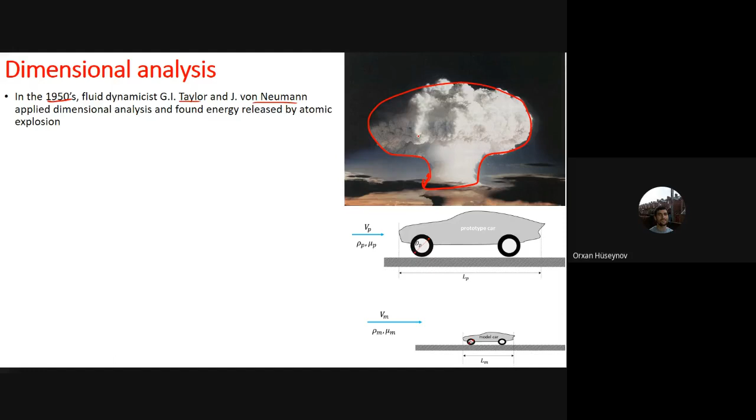So they actually did the dimensional analysis on this atomic bomb without doing its experiment, and they found the formula that governs the relation between the energy and its properties. So during an atomic explosion, you have the energy released by this bomb. That energy is a function of some parameters like its radius or its density. It can be the temperature, etc.

So by only writing the shape of the function and working with dimensional analysis, working only with dimensions, they found that E is a function of R, rho, T. For example, R squared rho by T, which is not true, just an illustration. So they found this relationship without doing an experiment, and you cannot get close to atomic bombs, it is impossible. Only by working with the dimensions of the properties.

So what they achieved is to save money. This is the first part of the importance of dimensional analysis. The second importance of dimensional analysis is that you are not producing the expensive full-scale product, but you are working with the model. Say you are trying to produce a car. This is the prototype car, the real car. Prototype means real.

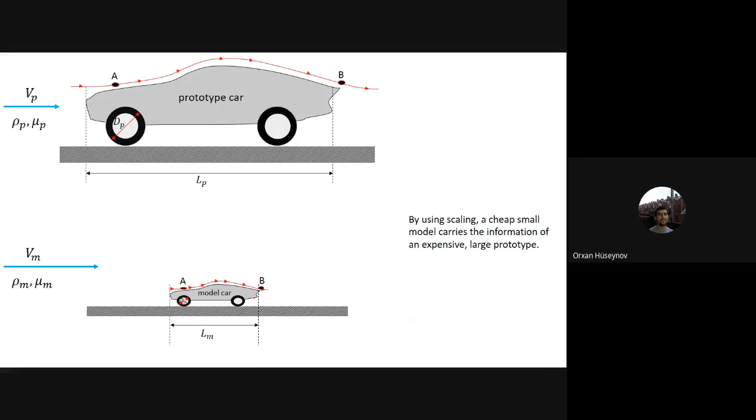Okay. Let's give you one simple example. Our example will be concentrated on the car because it is a more general example, and it is also easy to imagine. The force that is acting on the car depends on the length of the car, the density of the air, the velocity of the car, and the viscosity of the air. And by force here, I mean the force by air. The aerodynamic force, you can say.

The aerodynamic force acting on the car depends on the 4 parameters here: the length, the velocity, rho and mu. Okay. And you cannot find the relationship between them by mathematical analysis because it is a very complex flow that happens over the body. So to find the relationship between the force and these variables, we need to do an experiment.

So the experiment is that, firstly, I plot the force versus velocity, and I keep rho, L, and mu constant. This is the first experiment. In the next experiment, I plot the force versus rho, keeping the velocity, the length, and mu constant. Mu is viscosity.

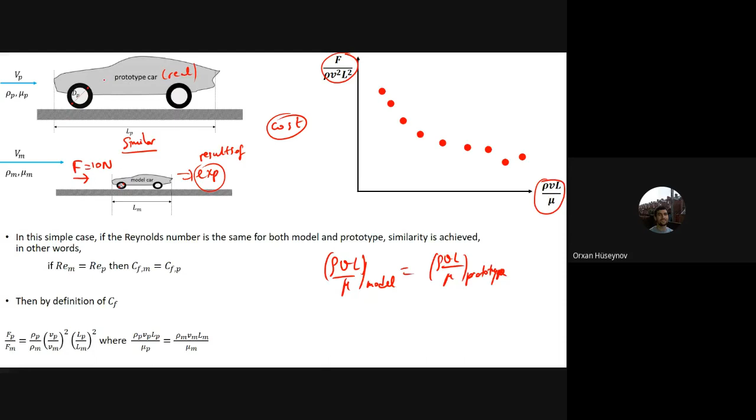For example, say that the friction force by air on the car is 10 newtons, and you are trying to find the friction force on the prototype car. To apply the result of this one on the real one, you should first be sure that the equation is valid for the model as well as the prototype. If it is valid, then the 10 newtons will be on the prototype car with some coefficient, for example 20 newtons or 30 newtons. We will find these coefficients in the next slides, but I'm trying to show the importance of the dimensional analysis.

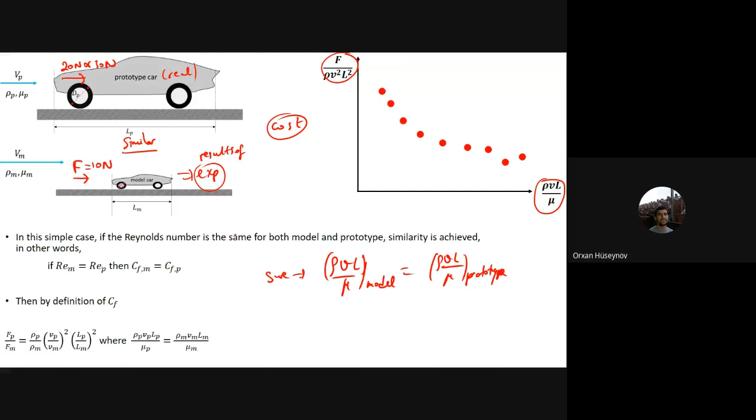So this is another important thing about dimensional analysis: firstly, it helps you decrease the variables from 5 to 2. And second, it helps you get the results from the model car by equating the variable for the model to the prototype one. If they are the same, these 2 are similar, and the force acting on the model will be proportional to the force acting on the prototype. This is another important thing about dimensional analysis.

Now let's do a small review on dimensions and units. A dimension is a measure of a physical quantity. For example, length, mass, time, temperature are all dimensions, and dimensions do not have any numerical value. A unit, for example Kelvin, is a way to assign a number to the dimension, like Fahrenheit or Celsius. When we say dimension, we mean length, mass, temperature, and when we say unit, we assign a number to that dimension with Kelvin, Fahrenheit, Celsius, meters, etc.

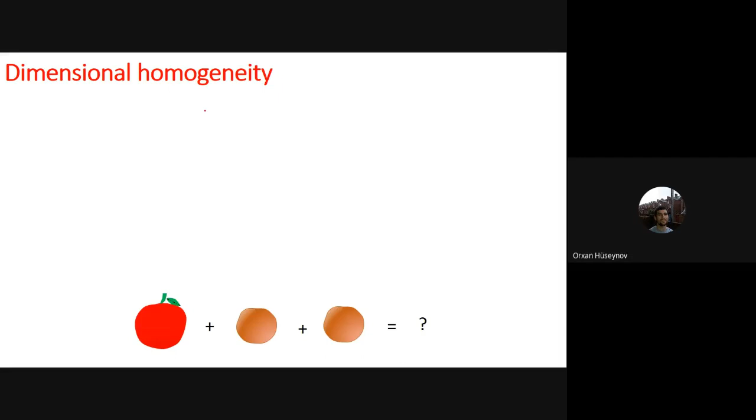Another thing about dimensions is that you should always have dimensional homogeneity. You cannot add apples and oranges together. For example, x equals s0 plus v0t plus half gt squared. It has a dimension of length, so s0 should have dimension of length, v0t should have dimension L, and this term also L. Otherwise, you will not have dimensional homogeneity. Each term should have the same dimension. Or Bernoulli's equation: this one has a unit of p by rho, but say that you don't know what the unit of p by rho is.

Even if you don't know the unit of half v squared, you are trying to find these two units. You can find these two units from the third one, which is the gz. The gz comes from mgz, if you remember, potential energy, and without m it will be joules per kilogram. If it is joules per kilogram, by dimensional homogeneity, this one is also joules per kilogram. This one is also joules per kilogram.

So therefore, if you write it in the dimensions of the primary units, length squared and time to the power of -2. That is the power of dimensional homogeneity. This one is for the units, joules per kilogram, but you can convert these units, joules per kilogram, into dimensions, and in that dimension it will have length squared and time to the power of -2. But you can also get this dimension from the v squared here. Okay.

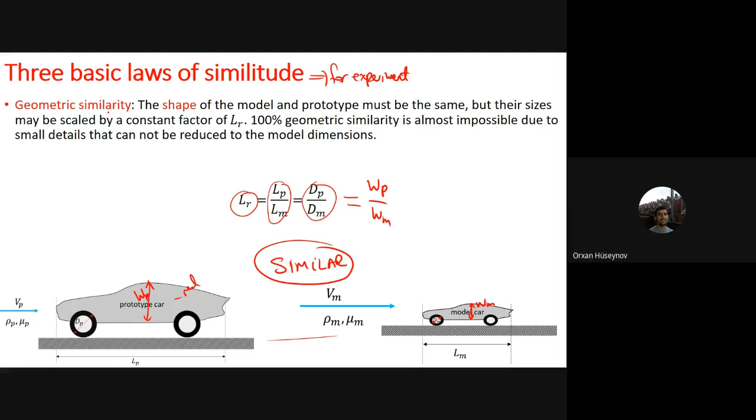Second is kinematic similarity. Kinematic similarity means that at any point over the car, the velocities should have a constant ratio. For example, for the real car, this is the flow trajectory. For the real car, the velocity at the front is VA, and for the model, the velocity here is V model A. But the ratio should be the same for the velocity of the fluid particle at location B for the prototype to the velocity at point B for the model. They should have the same velocity ratios at different locations.

You can even take, for example, the point here, let's say velocity C. You are taking the velocity at the same locations, on the same streamline. Therefore, the VC ratio between prototype and model should be the same. You should keep the velocity ratios the same. In other words, you have to have a similar flow pattern.

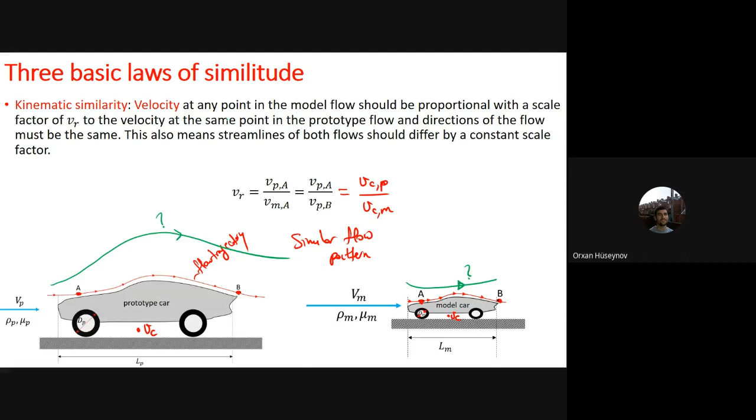And the last condition for similarity is force ratios. Forces should also have a constant coefficient. For the model car, if you have a force of, let's say, 5 newtons here, and for the prototype car it is 10 newtons, you see the ratio is 2.

But if I take another force here, for example, the weight of the prototype and the weight of the model, weight cannot be a good ratio here because it doesn't play any role. But if, say, sigma, surface tension, had a role here, if it was important, then the sigma for the prototype and the sigma for the model should also

be equal. Any force that is considered to be important here, let's say the lift force, F lift, the force that tries to lift the car. Similarly, F lift prototype divided by F lift model should be the same coefficient. So the forces should be in the same ratio. And if surface tension is very small in the prototype, it should also be negligible in the model.

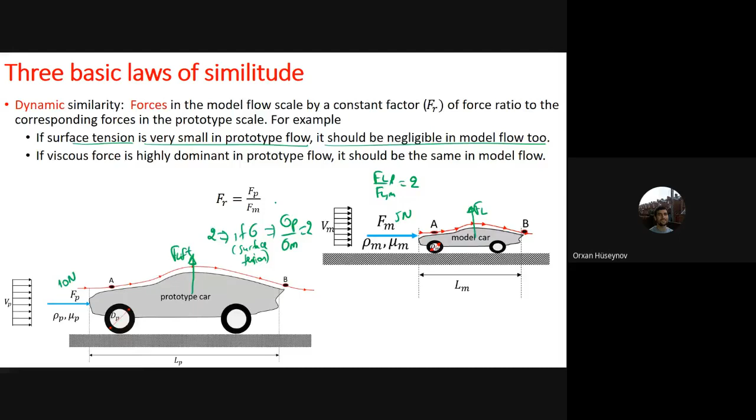But there is an easy way, which is Buckingham's pi theorem. What is Buckingham's pi theorem? With this theorem you are doing a dimensional analysis, and you find some non-dimensional variables, which we call pi. For example, F by rho V squared L squared can be one non-dimensional number. Non-dimensional means that they don't have any dimension. For example, rho V L by mu doesn't have any dimension.

So F by rho V squared L squared doesn't have any dimension. So let me look at rho V L by mu. Rho has a unit of kilograms per meter cubed; in dimension, it is mass by L to the power of 3. Velocity has a dimension of length by time, and this one has a dimension of L. Divided by viscosity, which is kilograms per meter second, mass per length time. If you do the calculation, the time cancels out, the lengths cancel out, and you will have no dimension.

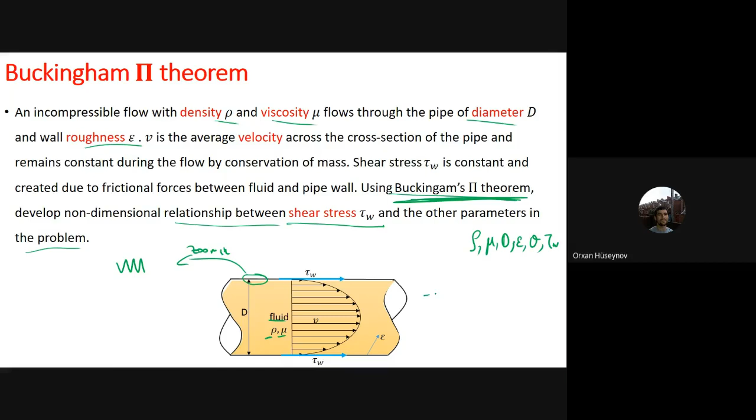Develop a non-dimensional relationship between shear stress and the other parameters of the problem. The question says that tau wall is a function of the density, the viscosity, the diameter, epsilon, and the velocity. Inside the pipeline system, this shear stress is a function of these 5 parameters, and we use Buckingham's pi theorem to find the relationship between these variables.

And for the pi theorem, we have the 5 steps that should be solved. Firstly, we should list all the variables. So for this problem, we have tau wall as well as these 5 variables, which makes overall 6. And you should also be careful that if you have included the diameter, area should be included too.

Okay. So the area should not be included, sorry. If you have included diameter, you should not include the area, because area is equal to pi d squared by 4. Therefore, no need to include both at the same time. Either you should include diameter or area. Anyway, for this problem, it is not an issue. So we have written the number of the variables here, and there are 6 of them. This is the first step for the pi theorem.

And the second step is that you are showing each variable with the primary dimensions. For example, tau wall, which is the shear stress, and shear stress is the force by area. If you write it in terms of the primary dimensions, it will be mass, length to the power of -1, and time to the power of -2. Or you can write the force as the mass into acceleration divided by the area. This one is m, acceleration is L, T to the -2, and this one is L squared. And you can write this one as m, L -1, T -2.

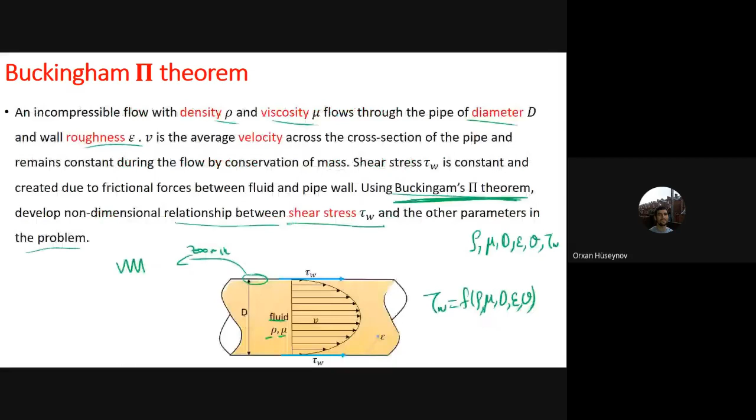There are some guidelines for choosing repeating variables. Firstly, we never pick the dependent variable, in our case, tau wall. Because if you remember, it was a function of the velocity, the density, epsilon, the viscosity, and the diameter: rho, V, mu, epsilon, and diameter. So we never select tau wall because it is the dependent variable.

Second, you cannot select parameters that make a dimensionless group by themselves. For example, if you select epsilon and d at the same time, this one has a dimension of meter, and this one has a dimension of meter, and you can make epsilon by d, which is dimensionless. Therefore you cannot select two parameters that make a dimensionless group by themselves. And the third thing is that you cannot select dimensionless variables like the angle.

And this is one of the most important steps. We select the common parameters. Common means that everybody knows it. For example, viscosity is not common, wall roughness is not common. These are not so common variables, therefore we don't select them. We select the common variables.

And the simple parameters, of course, this is also another important step. For example, energy is a complex parameter, and therefore we don't select it. Or you can say that there is flow rate V dot versus velocity. Here it is better to select the velocity as the repeating parameter, because V dot is more complex with respect to velocity. There is no need to select it.

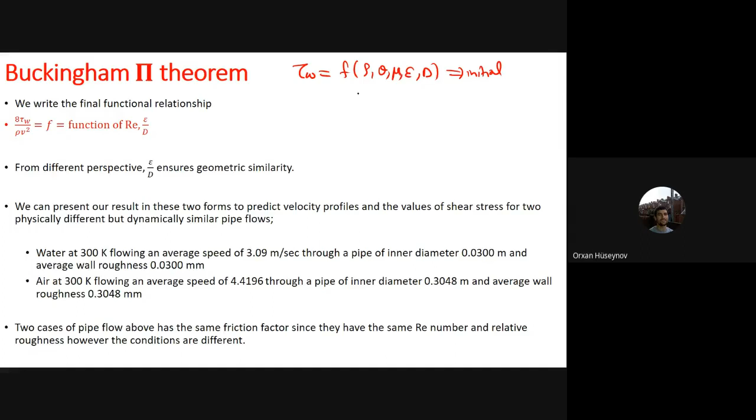In the first equation that was given, tau wall was a function of rho, velocity V, the viscosity, epsilon, and the diameter. This one was the initial. But after the dimensional analysis, what you have got is tau wall divided by rho V squared, from the first non-dimensional number. That one now is equal to a different function of mu by rho V d

and epsilon by d. So with the dimensional analysis, or Buckingham pi theorem, you have decreased the number of variables. It was initially 6 variables. Now you have got 3 variables. This one is dimensionless; these are just numbers, they don't have any dimension. You have decreased the number of variables from 6 to 3. This is the first important step that you have done.

And the second important step is that, by dimensional analysis, if you are doing an experiment, say this one is the pipeline for water, and in this pipeline you are trying to find the shear stress, tau wall. This one is the real one. But you are doing an experiment not on water, but on air, and you are trying to find, when air flows through the pipeline, what is the shear stress, tau wall. And to find that shear stress, one minute.

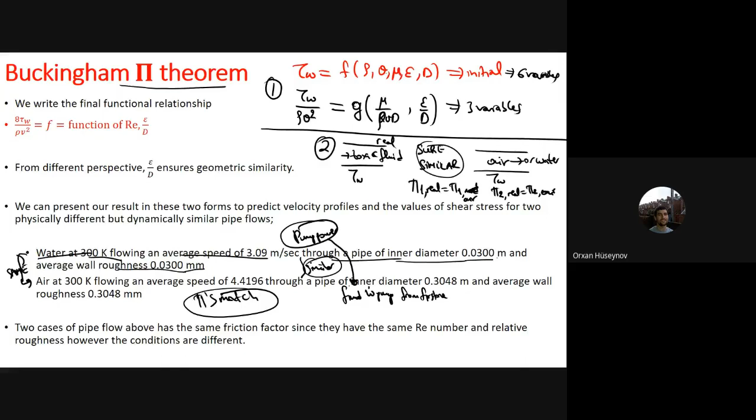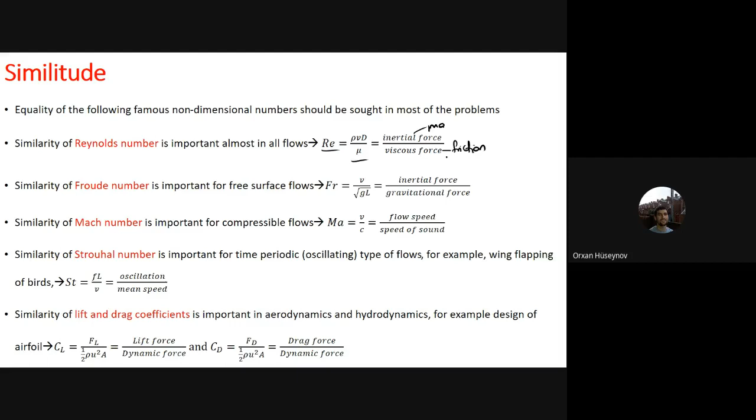So similarity, we have said it. The non-dimensional values here have the names of famous scientists. For example, the rho VD by mu ratio is called the Reynolds number, and the Reynolds number compares the inertial force, which is m times acceleration, to the viscous force, which is friction. Or V by square root of gL compares the inertial force to gravitational force. It's called the Froude number. Or the Mach number.

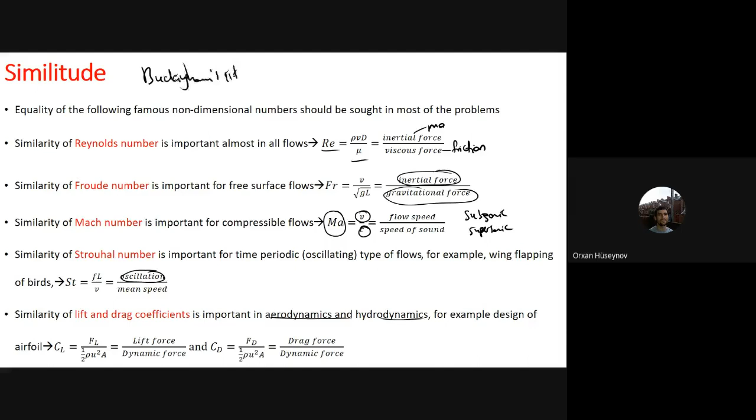This one compares the velocity with the speed of sound. If you remember subsonic, supersonic, that is stuff that you have heard from airplanes. Or the Strouhal number, which compares oscillation to the mean speed. And the lift and drag coefficients, aerodynamics and hydrodynamics, important stuff. So these are the non-dimensional numbers, and all of them are generated by Buckingham's pi theorem. And then you can have this non-dimensional number for your case.

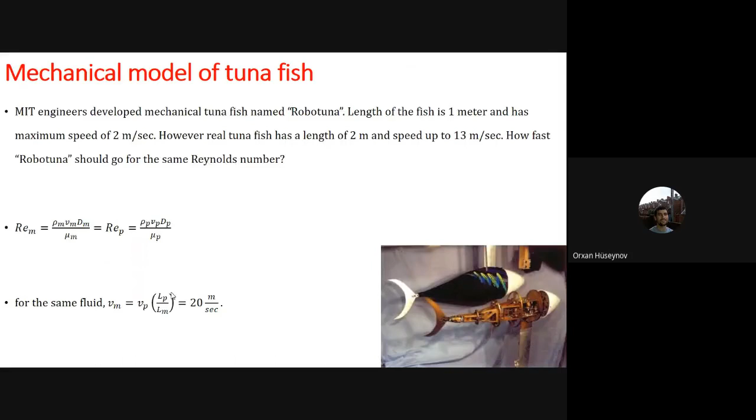So there is one more example here. The example statement is that engineers of MIT have developed a tuna fish, named it Robotuna. This is a mechanical robot, and it has a length of 1 meter and a maximum speed of 2 meters per second. However, a real tuna fish has a length of 2 meters and a speed up to 13 meters per second.

How fast should robot tuna go for the same Reynolds number? Or in simple terms, how fast should the robot tuna, the mechanical tuna, go to be able to swim as the real tuna fish? So to find it, you should know that this mechanical one should be similar to the real one. They should be similar. How do you know that they are similar?

The pi's match. Pi's match means that pi 1 for the mechanical tuna fish is the same as pi 1 for the real one. So this one is the mechanical and this one is the real. If they are matching with each other, then you can find the speed that is required for the mechanical one to be able to swim. And for this problem, if you work out Buckingham's pi theorem, you will get that this one should match.

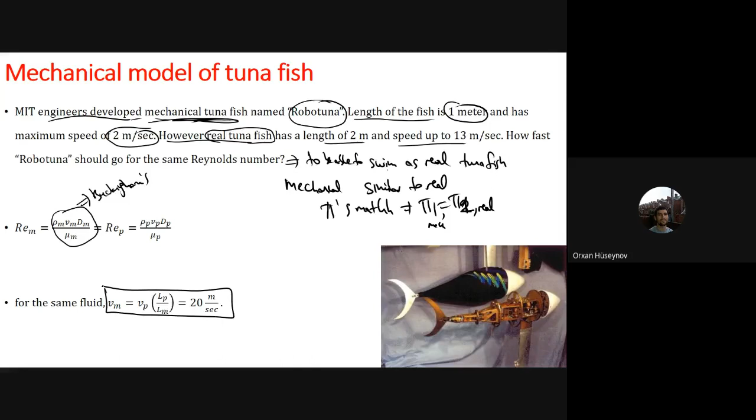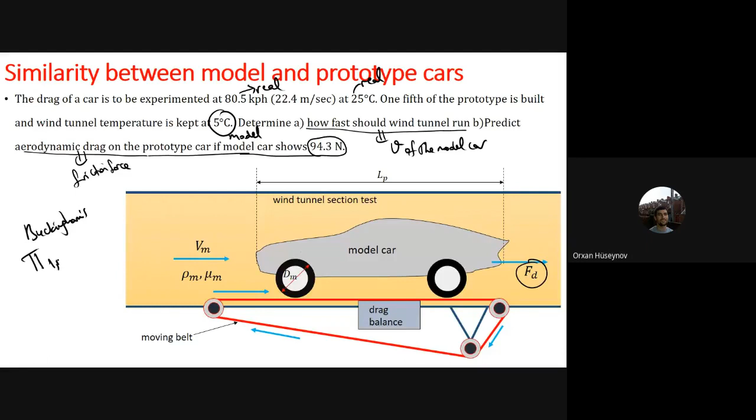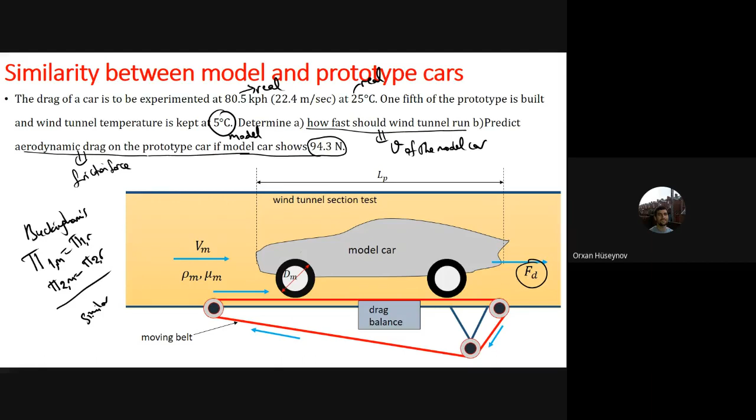To solve that question, you should use the Buckingham pi theorem. The Buckingham pi theorem says that if pi 1 of the model car is the same as pi 1 of the real car, and pi 2 of the model car is the same as pi 2 of the real car, then they are similar. And similarity means that you can find any property that you want.

Firstly, if you work out the Buckingham pi theorem, you will get the rho V L by mu combination. For similarity, this should match. This one is the pi prototype, and this one is the pi model. These should match. From this calculation, you get that the model car should go at a speed of 98.8 meters per second.

The second non-dimensional number that you will get will be this one, also by the pi theorem. From this calculation, if the model force is 94.3 newtons, in the real car it is 112.5 newtons. You can see the power of dimensional analysis. You are just doing the experiment on the model, and you are finding the values on the real one. That is the power of dimensional analysis.

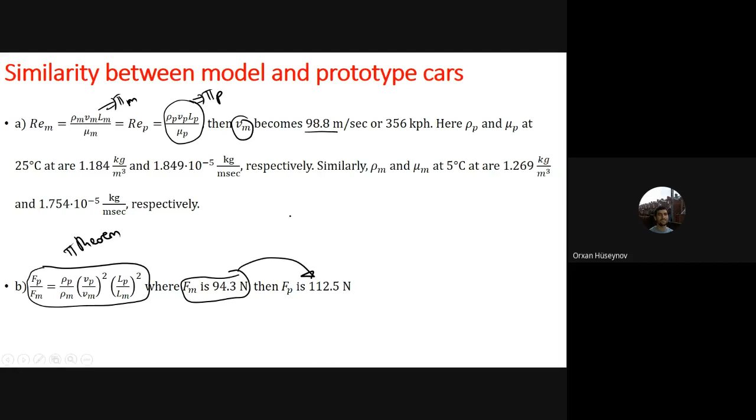One more thing about dimensional analysis is that it is not always possible to match all of the pis at the same time. Let me give you one example. Say that we have a truck with a length of 15.9 meters at 26.8 meters per second, and we are trying to test a model of 0.99 meters. For similarity, the Reynolds number, the pi equal to rho V D by mu, should match between the prototype and the model.

If you match them, you will see that you need a velocity of 429 meters per second for the model. This is a very large number, because if you calculate the Mach number, for the prototype it is very small, but for the model it is very large. It means that here you can have a sonic boom or shock wave, and due to shock waves you will have different flow physics for the model than the real one. Therefore, it is not always possible to completely match the similarity.

Another example: for boats and ships, the Reynolds and the Froude number must match. But if you do that, you will see that you will need a very low viscosity fluid for the model, and in reality it doesn't exist. There is no such fluid with this viscosity value. This is again incomplete similarity.